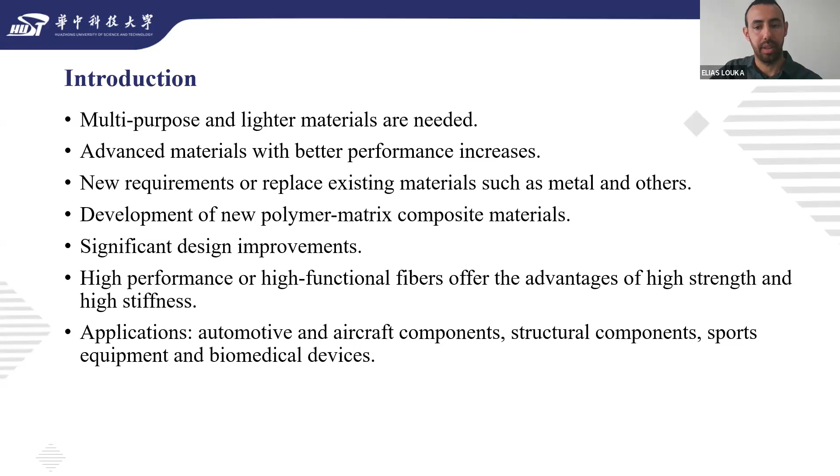Now let me introduce the idea of this research. The shape, type, size, and volume fraction of the matrix and reinforcing material have a significant influence on the mechanical, physical, and chemical properties of composite materials. In this study, therefore, the effect of glass and Kevlar fiber volume fraction on the mechanical properties of epoxy composite was investigated.

Understanding the effect of fiber volume fraction on mechanical properties is crucial for optimizing the performance of composite materials in various applications.

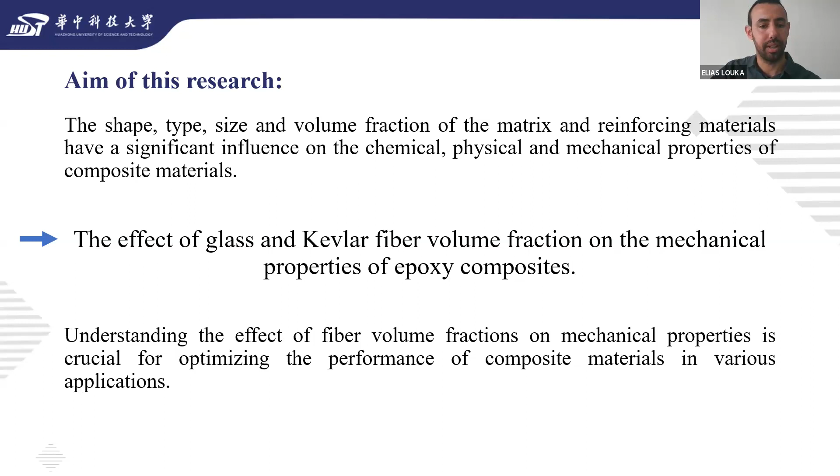In this research, different number of layers, total mass of non-impregnated fibers, and reinforcing material were used to create the specimen. As a result of the different number of layers, we produce specimens with varying thickness and total composite mass. Volume fraction was changed every time, depending on this parameter.

The fiber total mass refers to the sum of areal weight of the fibers before the epoxy was applied. Three cases of fiber total mass were used: masses of 2, 3, and 4 kg, with different number of layers, which depends on the areal weight of the specific material.

Specimens of fiberglass and Kevlar were prepared using the vacuum bagging method. We used epoxy resin as the matrix material. The mechanical behavior of the specimens were tested under uniaxial tension and 3-point bending. Specifically, we examined the sample stiffness and strength.

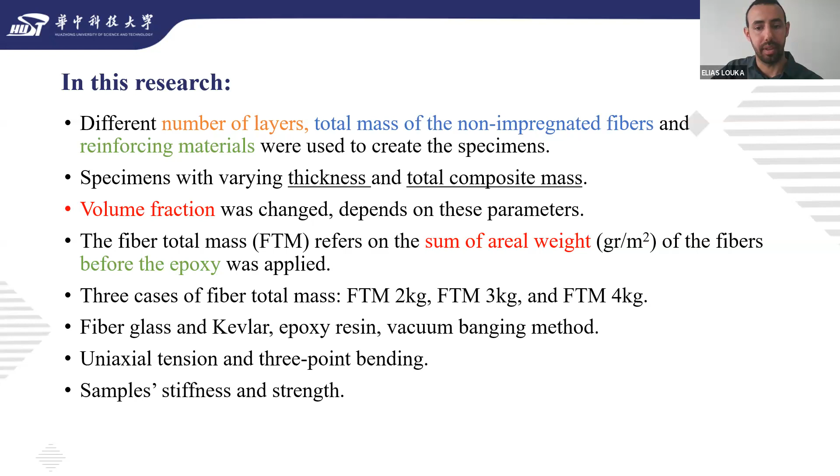Now let's move to the material selection. The composite were prepared using 2 types of fiberglass and 2 types of Kevlar with different areal weight, grams per meter square. A woven reinforcement with plain weaving at 0 and 90 degrees was used. You can see their thickness in the first table.

Epoxy resin was used as the matrix material. We will find some of its characteristics in the second table, like viscosity, hardener, curing time, tensile, compressive, and flexural strength.

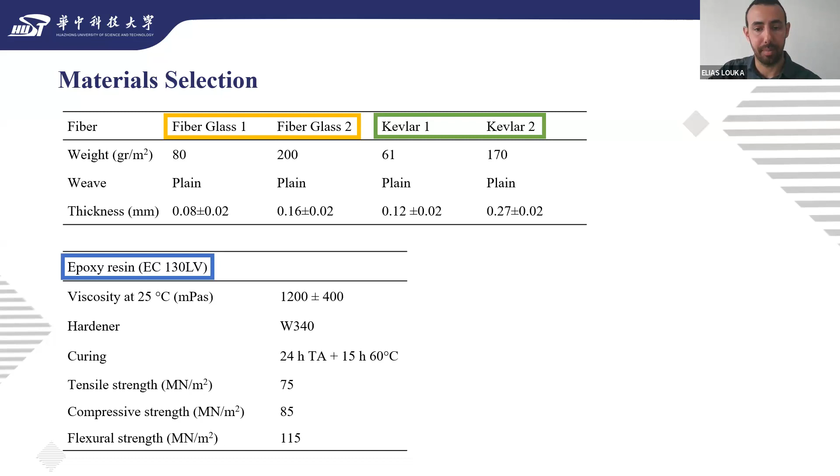About the material preparation: to examine the volume fraction of the specimen created by different number of layers for fiber total mass of the non-impregnated fiber, we use 2 types of Kevlar and 2 types of fiberglass. The mass per unit area for fiberglass is 80 and 200 grams per meter square, and for Kevlar is 61 and 170 grams per meter square.

Three different fiber total masses were investigated in this study. For the cases of fiber total mass of 2 and 4 kg, specimens of fiberglass of 200 grams per meter square and Kevlar 170 grams per meter square were prepared. For the case of fiber total mass of 3 kilo, all types of composite were used.

You can see the laminating structure of specimen about the different number of layers in the figure below. The yellow color represents the Kevlar and the white-blue represents the fiberglass.

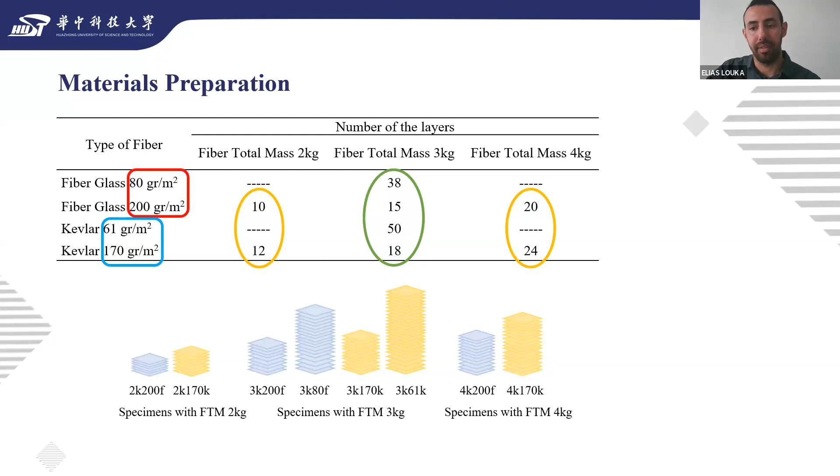The table here shows the abbreviation of the sample, the type of material, the areal weight, the number of layers, and the total mass of the fibers before epoxy was applied.

Now let me explain more about the abbreviation, because we will find it many times in the next slide. The first two digits of the sample abbreviation correspond to the varying fiber mass, which is 2, 3, or 4 kilo. The number next refers to the areal weight, and the last number defines the type of the reinforcing material, fiberglass or Kevlar.

About the graph, due to their different mass per unit area, we needed a different number of layers to prepare the required fiber masses. As a result, each sample had different thickness and mass when the epoxy was applied, so the final samples were produced with different volume fractions. These different values of volume fraction are represented by the yellow bullets in the graph.

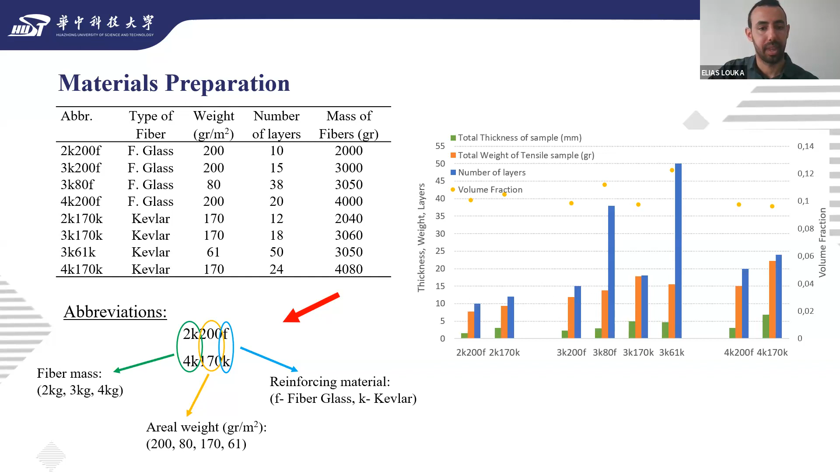About the sample construction, samples were prepared as sheets with multiple internal layers. A hand layup method was used to construct the specimen. First, reinforcing fibers were uniformly cut into multiple 250 millimeter pieces. The composites were fabricated using the vacuum bagging method for 1 hour, then cured at room temperature.

Then, the plate of composite material produced by vacuum bagging was machined to produce the sample. Samples for tensile and bending tests were cut to size according to this standard. Six samples were prepared for all different cases, and all the tests were done at room temperature.

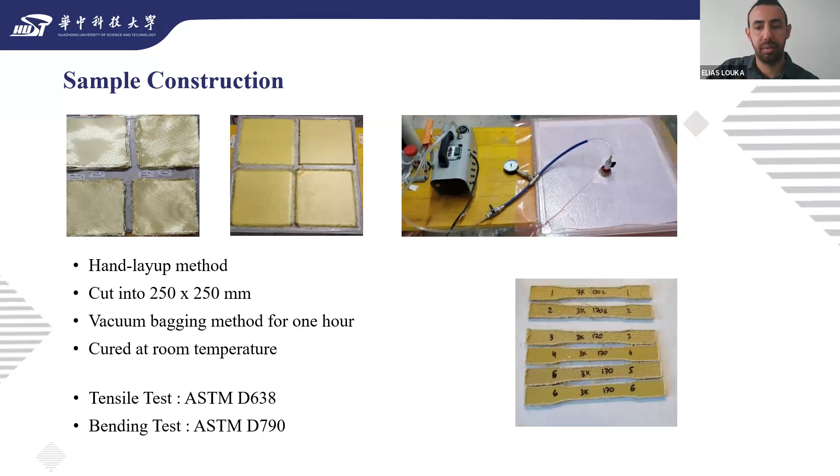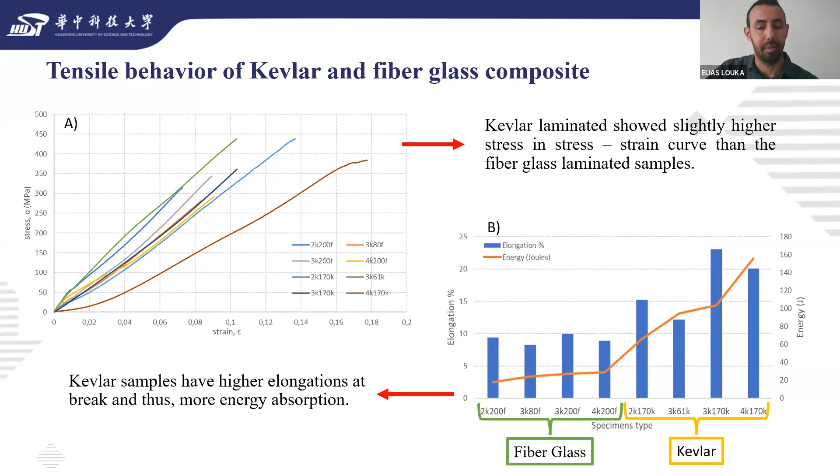The figure here shows the elastic modulus for all samples. In comparison, for cases of fiber total mass of 2 and 4 kilo, the sample produced by fiberglass had higher modulus of elasticity compared with those produced by Kevlar. This is because fiberglass samples have smaller total thickness and lower total weight compared to Kevlar samples. Fiber total mass of 2 kilo for both materials showed higher modulus of elasticity than the sample of 4 kilo.

For the sample with fiber total mass of 3 kilo, 4 different combinations were investigated, 2 fiberglass and 2 Kevlar. A comparison between the 2 reinforcing materials shows a significant difference in stiffness. Samples 3k80f and 3k61k have lower weight per fiber and a higher number of layers compared to the other 2 samples. However, because these samples have higher volume fraction, they showed higher modulus of elasticity.

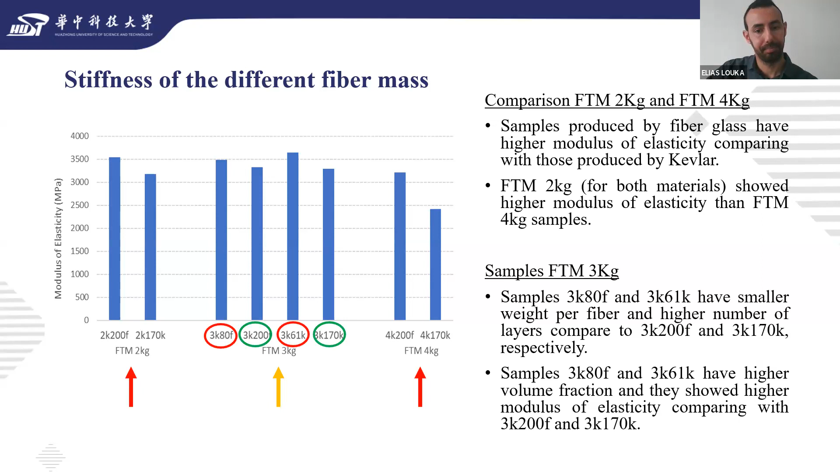In this figure, we can see the ultimate tensile strength per fiber total mass. The sample produced by Kevlar showed higher tensile strength compared to those produced by fiberglass. Now, if we compare the different masses, we will see that the sample of fiber mass of 3 kilo shows the higher tensile strength for both materials, fiberglass and Kevlar.

It can also be observed that the Kevlar sample has better toughness and ductility than the sample produced by fiberglass. On the other hand, fiberglass samples have lower ductility, but they have higher elastic modulus in most of the cases.

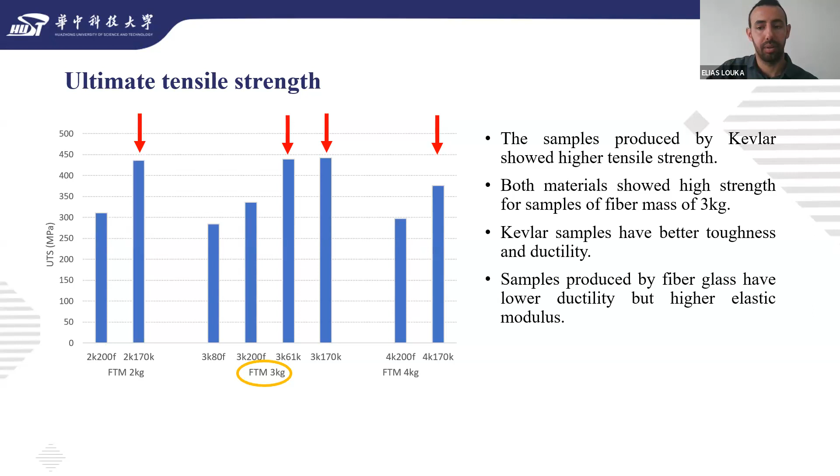Now we are moving to the bending test. Here we find two curves of load displacement of the composite materials with different fiber mass under bending load. The bending strength of the sample was calculated for maximum load and break.

Generally, all specimens exhibit initially a linear load increase, followed by a parabolic increase due to local crack initiation and a final failure. As you can see, only the sample 3k80f showed purely linear behavior prior to an abrupt failure.

The specimen with mass of 2 kilo, shown in blue in the graph, has the highest displacement and the lowest carried load. The samples 3k80f and 4k170k have the highest carried load for fiberglass and Kevlar samples, respectively.

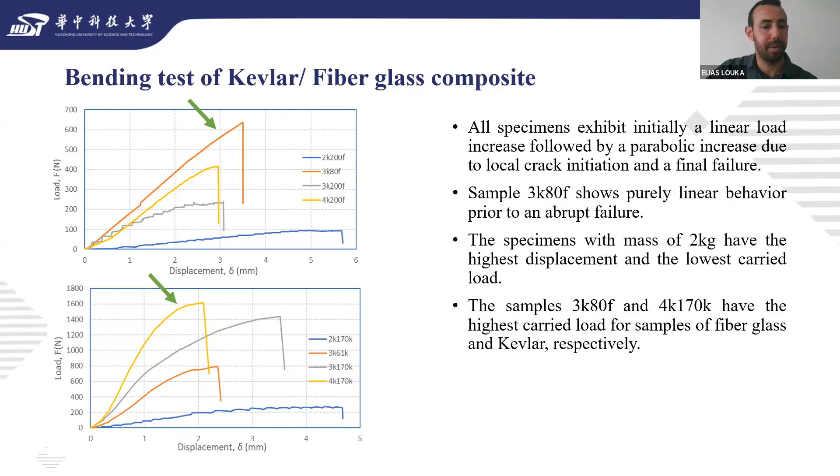Now comparing the different materials by sample, the lowest values of bending strength were observed for the sample with fiber mass of 2 kilo. It can also be seen that fiber mass of 4 kilo had higher tensile strength but lower bending strength compared to fiber mass of 2 kilo. Sample with fiber total mass of 3 kilo showed the highest values for bending and tensile strength in almost all different cases.

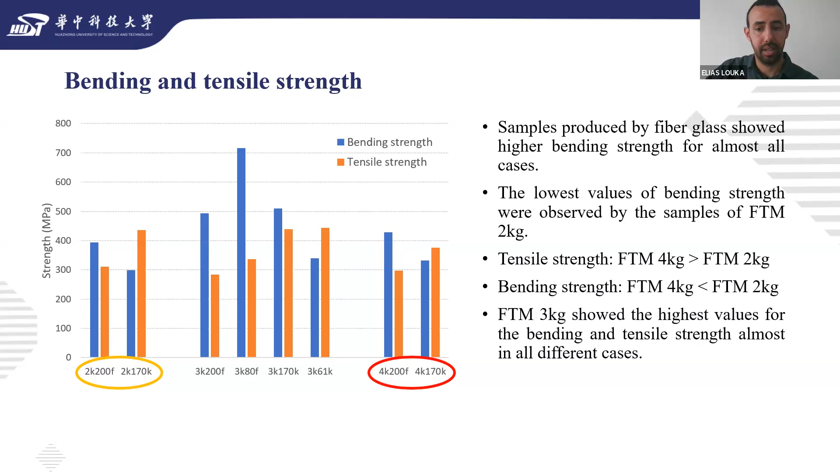Details for the bending and tensile strength to weight ratio in relation to volume fraction are shown in this slide. Analysis of the tensile test results show that the 2 kilo fiber mass samples reach a higher strength to weight ratio compared to the others for both materials. Kevlar sample 2K 170K demonstrates the highest tensile strength to weight ratio. The sample produced by fiberglass showed higher bending strength to weight ratio across all fiber masses compared to Kevlar. Fiber mass 3 kilo exhibits slightly higher bending strength to weight ratio compared with fiber total mass of 2 kilo, while the fiber total mass of 4 kilo shows the lowest strength.

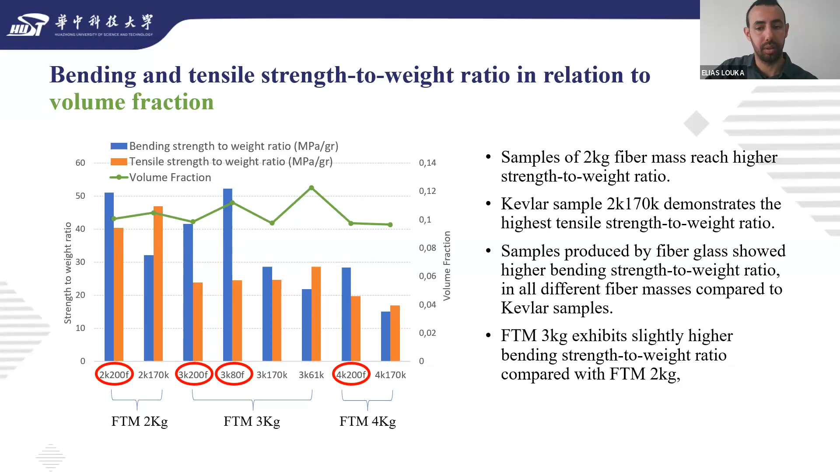Let's move on. This figure shows the stiffness to weight ratio in relation to volume fraction. Here, stiffness refers to the tensile modulus of elasticity. The sample with fiber mass of 2 kilo showed the highest stiffness to weight ratio for each material, while the sample with fiber total mass of 4 kilo demonstrated the lowest values. This is because the increase of fiber mass, and the associated increase in number of layers, plays an important role, since the thickness and total weight of the sample increase as well.

Samples with fiber mass of 2 kilo have smaller total thickness and lower total weight compared to the other samples, and due to this, less epoxy fraction. The sample produced by fiberglass showed higher stiffness to weight ratio compared to Kevlar for all three fiber masses.

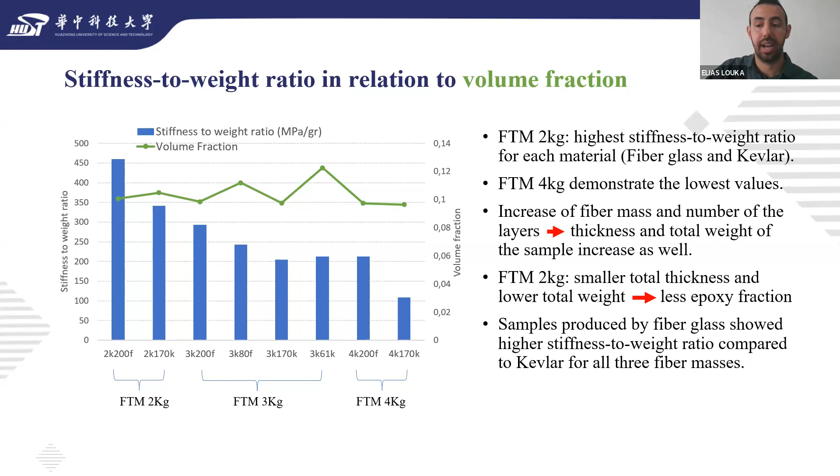Let's move to the final results of this research. The tensile test showed that Kevlar has higher strength than fiberglass for all material combinations and all different fiber masses. Fiberglass showed better stiffness results, with higher modulus of elasticity compared to Kevlar, for the fiber masses of 2 and 4 kilo. It can also be observed that Kevlar samples have better toughness and ductility than the samples produced by fiberglass. On the other hand, the fiberglass samples have lower ductility but higher elastic modulus.

And now about the bending test. The bending test showed that the samples produced by fiberglass have higher bending strength for all different masses compared to Kevlar.

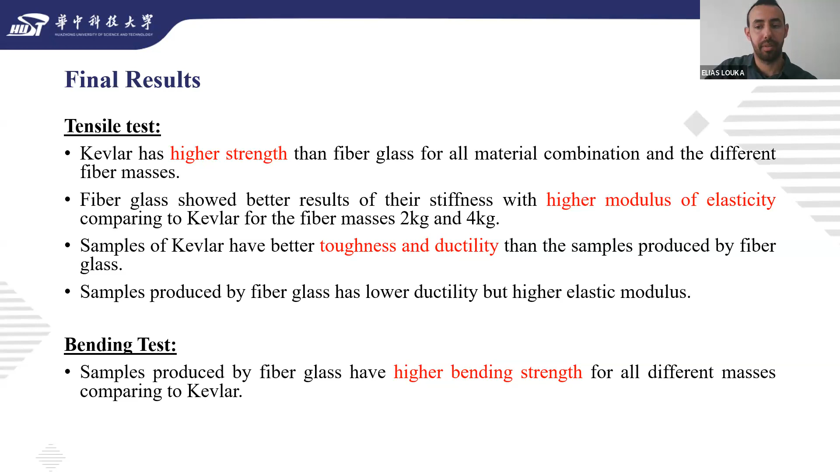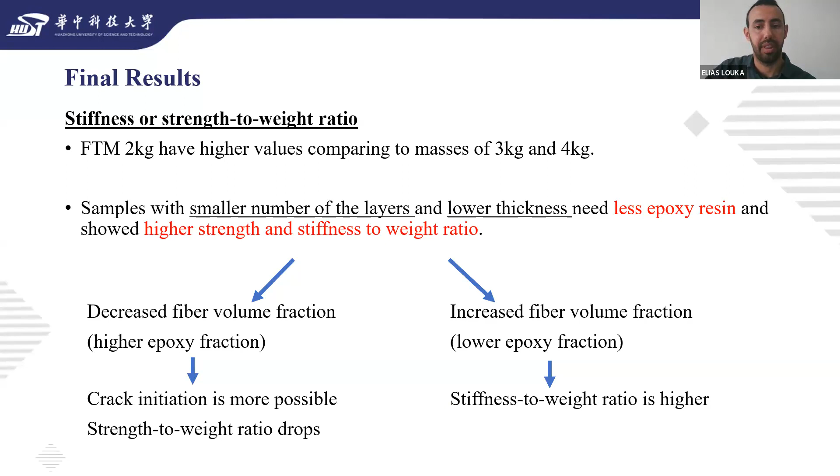As a conclusion, the aspects of varying layers, fiber properties, sample thickness, fiber mass, and total composite mass—in other words, volume fraction—were found to play an important role in the design of a composite with an optimized stiffness or strength to weight ratio.

Furthermore, the findings of this research contribute valuable insight to the field of composite material science, potentially leading to the development of stronger and more durable epoxy composites. Finally, by elucidating the relationship between fiber volume fraction and mechanical properties, this research may inform the design and manufacturing processes of composite materials for real-world applications.